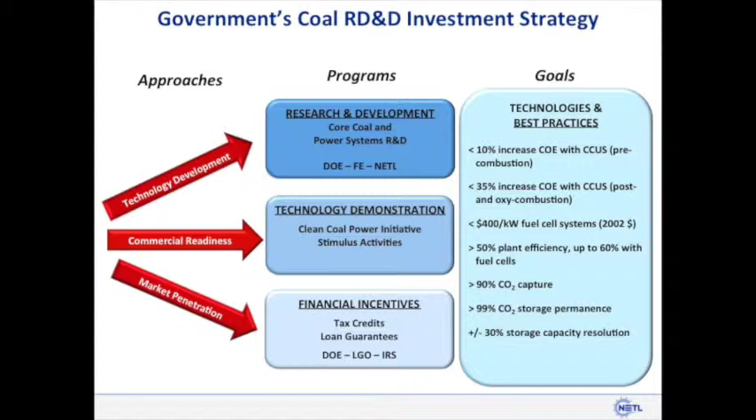As you can see, we've been working on this issue and these programs since the early 80s. I don't go quite that far back, but you can see we had the Clean Coal Program, Power Plant Improvement Initiative, Clean Coal Power Initiative, and industrial carbon capture programs that we've been pretty much consistent with over time, bringing R&D technologies to the commercial marketplace. Way back when, the drivers were the Clean Air Act that the government put into place, and subsequently the R&D to support implementation has been around. Hopefully with the new regulations coming out, we expect a similar arrangement where the government will increase our ability to facilitate and help technologies get into the market.

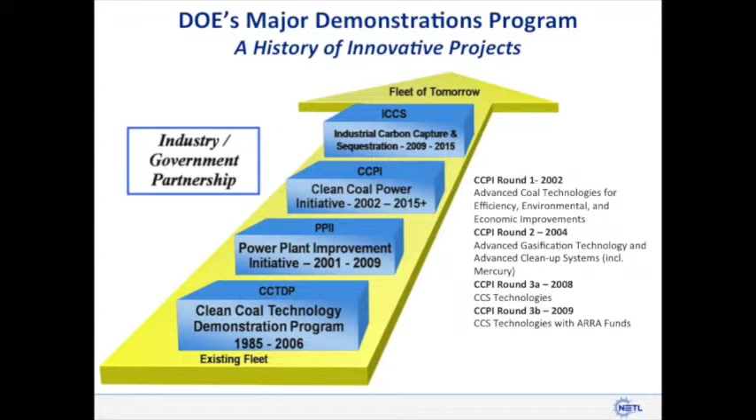Just showing you where they're at. The Petra Nova project is one of the projects. It's located in Thompsons, it's 240 megawatts. Notably, its plans are to put 1.4 million tons of CO2 as EOR for the West Ranch Oilfield.

You can see our share is 167 million. We're a small player with a $1 billion project. Typically in the past we've been up to 50% cost share, but quite often we get in situations where 167 is sufficient.

Again, to get a sense of where we're coming from, this was CCPI round 3. One of the reasons why it's 167 million is that originally it started at a much smaller scale, 60 megawatts, and grew to 240. At 240 it looks like a little bit, but at 60 megawatts, it was a significant cost share.

As I mentioned, the focus of the CO2 that makes it very commercially viable is to put it in EOR fields, particularly existing EOR fields. This particular field had not been doing CO2 injection other than water alternating gas cycles, WAG cycles, but this is a little different.

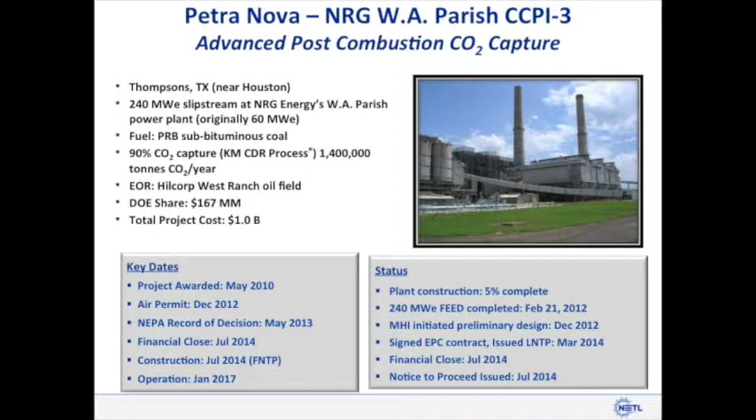We go all the way back into 2010, an award of 167 million to a 60 megawatt project at the time. They started their front-end engineering and pretty much quickly found out that 60 megawatts worth of CO2 will not charge the reservoir fast enough. You'll get your return on investment where it starts producing well moved out about 5 or 10 years, and by obviously quadrupling the amount of CO2 you're putting in, you get a quick charge on the reservoir.

That turned out as one of the things that doing the FEED upfront work brought out. The other note I want to bring up is that we don't finish our final Environmental Impact Statement until 2013. I don't want to say that when you get DOE money, you have to do NEPA - that's true - but typically NEPA doesn't take 3 years to do. It's usually 18 to 20 months; 2 years would be our general target.

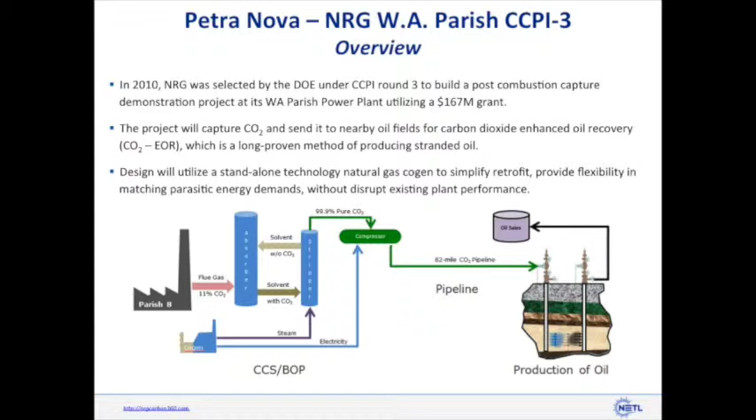One of the reasons it was changed, or it took 3 years, is in part to change the design. And give you warning that the involvement is that you have good news - you figured out that 240 is the appropriate amount. Bad news is quite often that doesn't quite fully restart, but it generally restarts a lot of your NEPA activities.

You may need to do additional public scoping and things like that, modeling for a different size project. So, good news, bad news. What's notable is that they did issue a limited notice to proceed in March of 2014. They closed essentially in the July timeframe of 2014, and they're fully into fabrication, construction on site, and everything like that. So for us, it's a big success story.

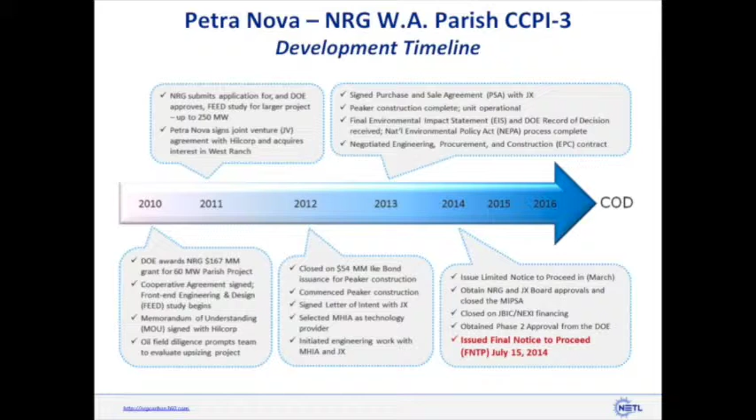Out of that, they own the cogen unit. In order to not disturb the existing coal-fired power plant, meaning they needed additional steam and additional power to drive the compressors and the capture system, they essentially put a small cogen unit in. They ended up owning that unit.

It's been evaluated. You can see the 5 levels of the 5 projects, all the way from 2 tons per day, all the way to 25. And the only thing I can say is the bottom one, 25 megawatts, 500 tons per day plant Barry, which started in June of 2011.

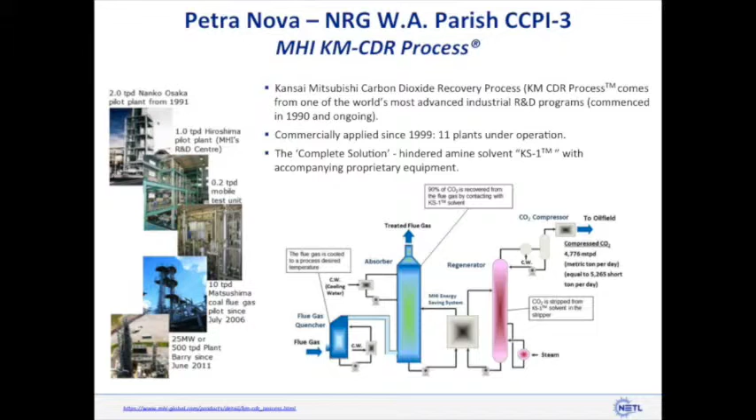Now, as a technologist, of course, it'll work. But as most of you know, it's site - everything is location and the specifics of it. So the idea is that this project probably goes forward because of the 25 megawatt small scale demonstration at plant Barry.

Keep in mind, it's a 10 to 1 scale up to go from 25 to 250, or 240 at the Petra Nova site, but that is sufficient. And we think that particularly international bankers in Japan did many tours out to the plant Barry site to make sure that you've got the on-ground experience working and getting these things done.

Hopefully DOE's plans are to follow that model and continue doing small-scale demos with the potential of going to large scale, recognizing that a 100 to 1 scale up of technology is just not going to fly. Or if it will fly, you better have deep pockets and a high risk premium or something along that line.

I'm not the technologist of it, but I do know that this is coming off of an unscrubbed PRB coal-fired unit. Obviously, they're cooling it down and trimming, running it through an absorber system, a catalyst absorber system, and a regenerator, and subsequently compressing on-site and into the pipeline.

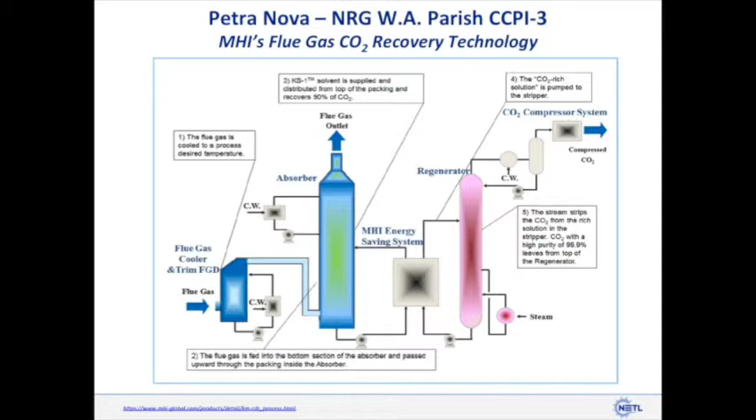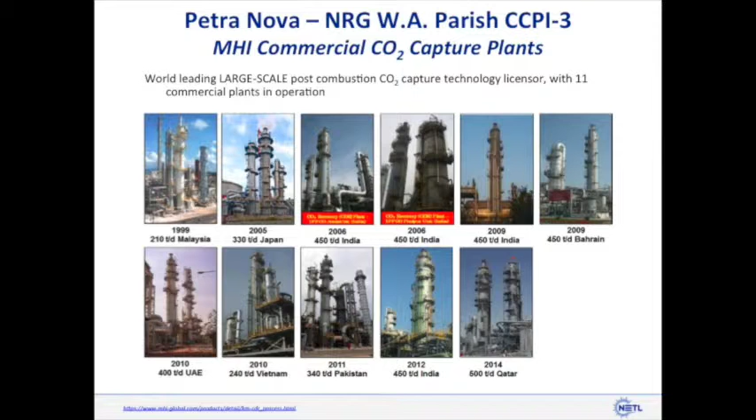Okay, CO2 essentially put on the ground. Right-of-ways have all been prepared. That's an exciting proposition - I'd say 90% of the path of the pipeline to the West Ranch oil field was in established right-of-ways, which is very nice. There's a lot of pipeline and gas lines already going into the area, so adding another line is probably pretty quick.

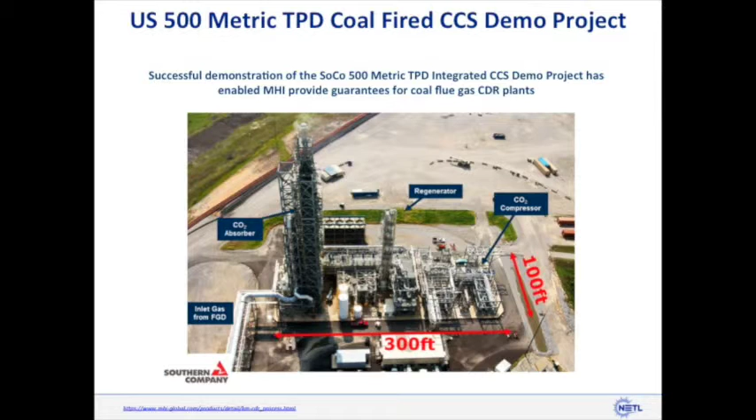As a side note, I was the project manager on the FutureGen project, and this was a total nightmare trying to run pipelines through farm fields where the owners had never done right-of-way. So the advantage of having an area where people already have right-of-ways is critical - that absolutely made the process go much quicker. We're starting to lay pipe, but pipeline laying is not on the critical path.

You see these - essentially we separated at the oil field. This oil field had already done CO2 injection and others, so they have a lot of facilities. But it turns out you have to deal with thousands of wells already set in place for water and other things. When you're injecting CO2, you have to repurpose a lot of these wells and do a lot of analysis of wells, opening and closing them.

From our earlier slide, there's about $300 million for the pipeline and the field work, but this is where the money is made - these are critical on how you're going to get the CO2 down.

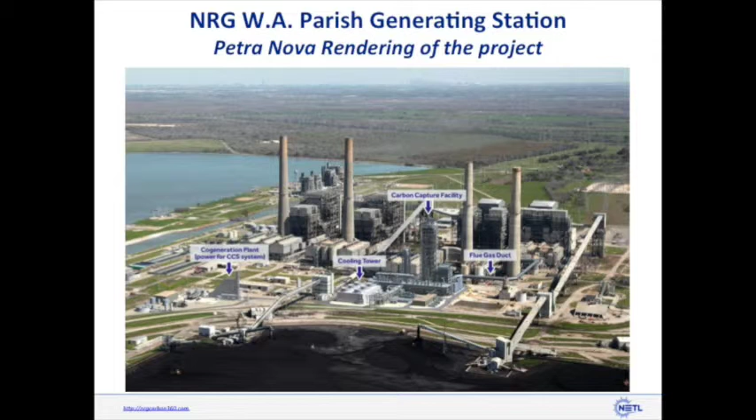Notable here, and it's always debatable, is that 1 ton of CO2 can produce up to 4 barrels of oil. That's always a good point of discussion - one of the best kept secrets I've ever seen. Everybody I've talked to who's doing CO2 EOR injection tells me it's site specific how responsive the oil field is, but in this situation that's probably appropriate. So you can imagine, even at low prices, getting 4 barrels out of a ton of CO2 pretty quickly pays for itself.

One of the things, as I mentioned, is you get NEPA when you get the DOE money, and you also get a monitoring plan. One of the things we've put into all our cooperative agreements for major demonstrations is a requirement to monitor where the CO2 goes and calibrate, essentially building a reservoir of information. My coworker John Tinsky will talk more about reservoirs tomorrow. Our point is we've been charged to develop these environmental monitoring plans, which are new to the oil field operators, who quite honestly want to protect their resources.

They really do not want a lot of information released regarding how productive the oil field is. Even that capacity number of 60 million - that's just what they told us. We don't have any technical data to verify they can get 60 million barrels of oil out of it. That's just a number they gave us to show the financials work and the rate of return is reasonable for everybody playing the game. We don't know that. But what we're doing is trying to characterize the field, establish what it is, and be able to monitor during the operation and post-operation.

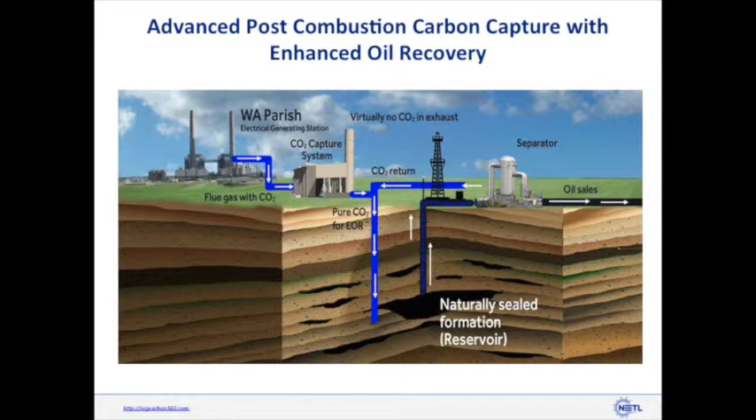We are on the hook to do the monitoring for 3 years, which is probably not sufficient for how long there's going to be CO2 injection. That's how long our cooperative agreement goes. We'd obviously love to maintain and continue this monitoring activity. But essentially, we want to verify the plume, where it's going, and its guarantee of CO2 capture. That CO2, obviously you put it down, it comes back up, you need to recycle it, so the leakage is reduced, essentially eliminated, and then you're not contaminating various strata above where you inject it.

As I mentioned, here's some of the key elements of it. Obviously, we're going to try to do CO2 mass accounting, taking measurements, certainly recording what's going in, what's being recycled. We're obviously also going to be doing some pressure monitoring above the injection area to make sure that we're not over-pressurizing the strata. We're doing geophysical monitoring. We run 4 wells during the CO2 injection.

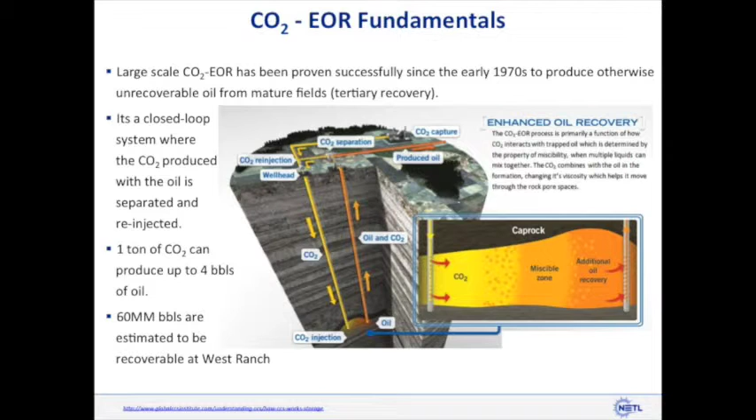Shallow water, I want to verify that nothing's percolating, cracking out through and contaminating the water tables. Fluid modeling, we're going to take all this data, put it together, and be able to predict where it's going to go and how it's going to be in the long term. And there will be some chemical baselining in order to essentially characterize the strata that's being injected into.

And some heat exchangers and things like that. Major equipment is being fabricated, the regenerator and the absorber vessels. Plus, Mitsubishi is working hard and doing some final proof testing of their large CO2 compressor. I think everything gets shipped out essentially within the next 6 months. The compressor and the absorber vessels are the critical path, some of the largest ones being made. And hopefully the target is the end of 2016, maybe early 2017, to be putting the first CO2 in the ground.

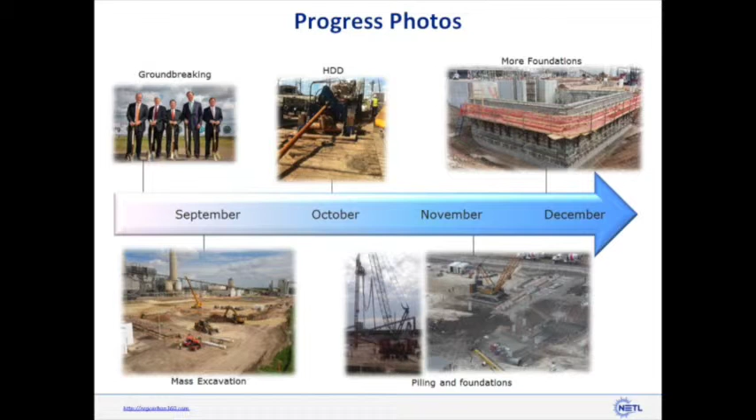And so I think the technology would work, but the integration is quite often where you flounder. And everyone's probably in the same type of situation. Going 4 times the units of what you made is one thing, but 4 times scale is really critical. That's what I think. So Kemper is moving along. We believe it's going to be running by the end of the year. And it is getting closer.

And my point there, just from a novice, and I honestly have not been there other than just noticing that integration is complete. And you had some geological stuff that nobody knew about, some subsurface stuff that you end up having to reinforce. Murphy gotcha. Other questions?

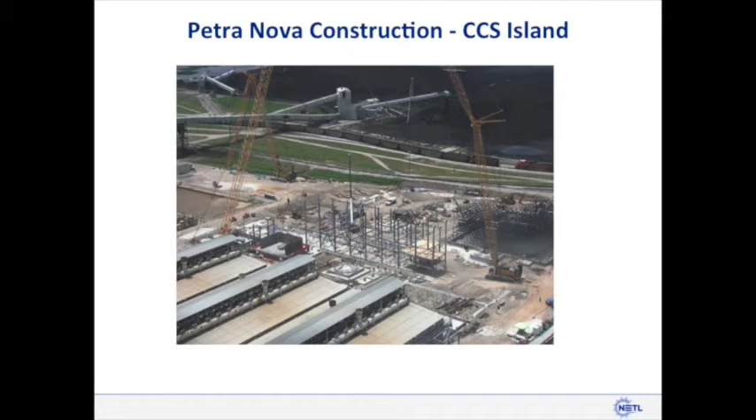John Lurker with Petra. I know with a lot of the EOR projects. Further away. You're going. Okay, sorry. Is that better? Yep. Okay, thank you.

With a lot of the EOR projects before, there was a lot of back and forth between the plants producing the CO2 and the oil field using it. And that was even around $80, $100 a barrel. Now we're at 50, 60. I guess the first part of my question is, is that still a contentious issue? You're saying the total economics still work. Have they sorted out who shares what?

And then the second piece of that is when you put up that 17 billion barrels of recoverable, were the economics and the cost of the CO2 put to all of that, or is that just a high level estimate? No, okay, let me go back to some questions. 17 billion is just a government number that says if you have CO2, you can recover it. It has nothing to do with price.

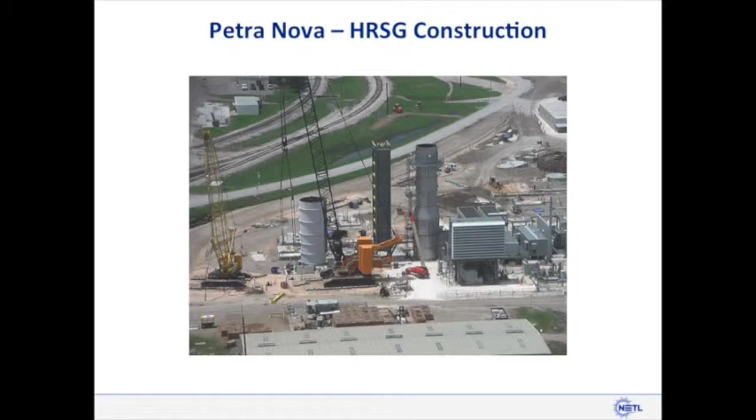And to that extent, once you start charging, you can't stop it. And you've already invested the capital. If you take the capital out completely, and you have it established, then it's all gravy. Because even at $50 a ton of CO2, you're still getting $200 worth of oil if it's 4 to 1.

And when you own the system in between when you're producing the CO2, it's a lot cheaper. I don't know what Denbury and the systems there are charging, but unless you have a natural reservoir of CO2, the truth is getting CO2 from coal-fired power plants is the cheapest next to naturally occurring domes like Jackson Dome. Does that answer your question, Ron?

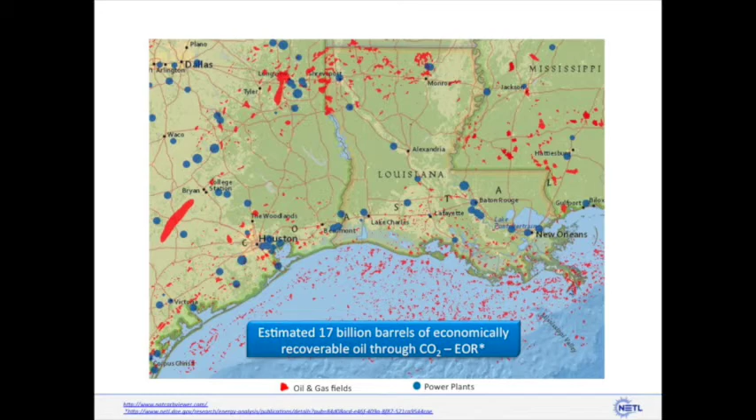Yeah, I guess my question still is, who pays the $50 for the CO2? Is it the power plant or the oil field? Because in the past when I've heard those discussions around EOR, the issue was who gets paid, whether or not the $50 balances out, who gets the benefit of the CO2. Right. No, this project doesn't go forward unless you have a partnership with the oilfield.

In fact, Summit is pursuing that exact point to get into an arrangement with an oilfield. The problem with the oilfield is they need a long-term, 20-year supply of CO2, because once you start charging the field, you're not going to stop. And so the idea is a combination of a power plant that wants to run for that period of time, married up with an oil field that wants to see CO2 that consistently.

I don't want to say it's the tail wagging the dog, but the oil field sets everything. So getting that relationship and that agreement is really key, because that's where all the revenues are going to come from. If you just try to put CO2 in a saline reservoir, you're going to run into FutureGen type stuff, where who's going to pay for the CO2 that goes into the ground? If you're in Chicago, you were going to pay a premium on your rates. So, thank you. Other questions?